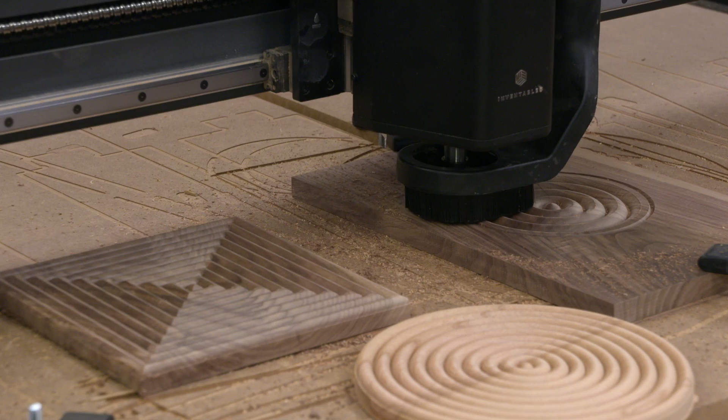Recently, I was on the internet looking for some simple, easy project ideas for our CNC machines. One thing that really caught my eye was an item called a Nordic tray. It was a simple wooden tray, but it had a lovely shape and form. It had a waveform to it, and there was a whole series of steps made by a repeating cut from the router. It looked like either a straight bit or a ball nose had been used.

And I thought, hey, that is a fantastic idea. And I did a little more looking and found all sorts of items. Easy to make, great scrap wood projects, great gifts, and that's what we're up to today on CNC Basecamp.

Well, to create the step patterns for our accessories, there are a couple of different bits that we may want to use. First off, take a look at these. These are round over bits. They're kind of the type you'd use for making a beadboard. So instead of having a pilot, they come pretty much to a point. Now I've got a 1/4 inch here, a 1/8 inch radius, and a 3/8 inch radius. That's a pretty good selection. And so those are going to give kind of a rope-like or rattan look to our products. And I think that's going to be a lot of fun.

Also, we can use a ball nose. Here I have a 2-flute upcut, which is going to give a nice aggressive cut. And here, of course, a core box bit. So the larger bits we're going to use are going to be core box. The smaller ones can just be a straight end mill. And finally, if we wanted a groove that has corners on it, just a plain straight bit like this will give great results. So you can try different things. They're each going to look a little bit different. See what you like. And with that, let's go ahead and get started on our first project.

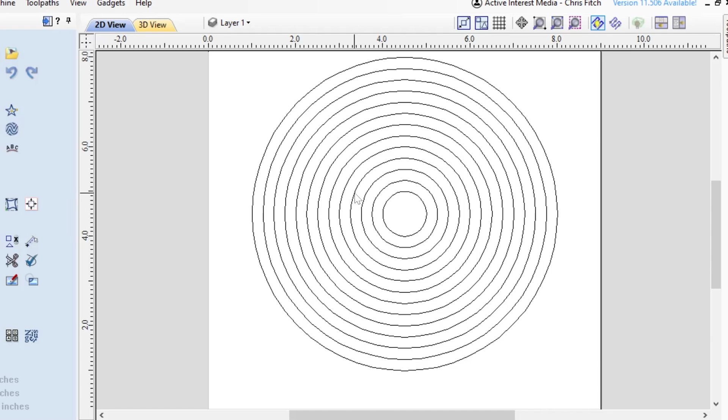Now for any of these projects, one of the first things I had to determine was the spacing between the cuts, because for a lot of these I'm choosing to have the router bit cut directly on the line. Now the spacing is going to be determined by the diameter of the router bit and the type of router bit. So let's say I'm using a 3/8 inch radius roundover. In order to get that kind of semicircular rattan look, the spacing is 3/4 of an inch, or twice the radius.

In this case, I know that I'm wanting a 1/4 inch spacing in these steps, and so that's what they are. This first step begins at 1 inch for the overall diameter, and then from there each one extends out until I achieve my final diameter for the bowl.

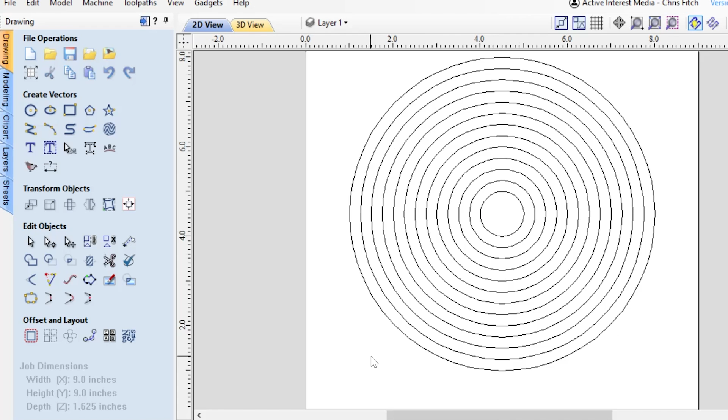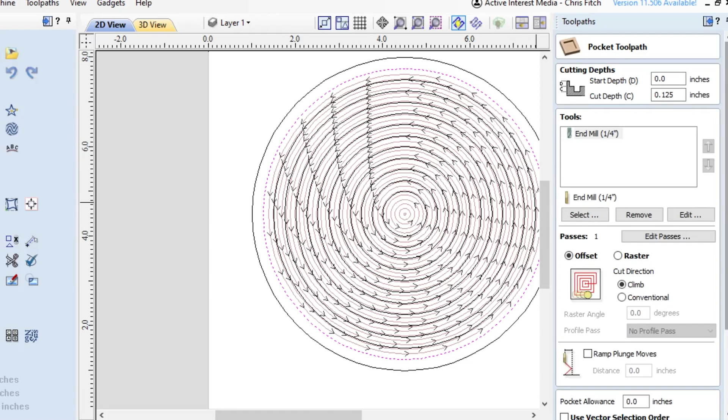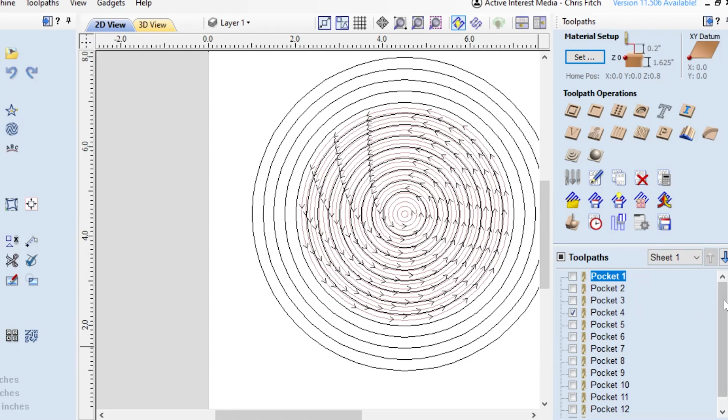Now to set up the different cuts, each cut is a pocket cut, and so the first pocket cut is this first interior ring, and all the material within that boundary is going to be cut down to a depth of 1/8 of an inch. Once that first pocket is cleared, we're then going to go to the second, the third, and so on until we're all the way down at the very bottom of the bowl, which is going to leave approximately 1/4 of an inch of thickness at the very bottom. So we do need to know our overall thickness of our stock before we begin.

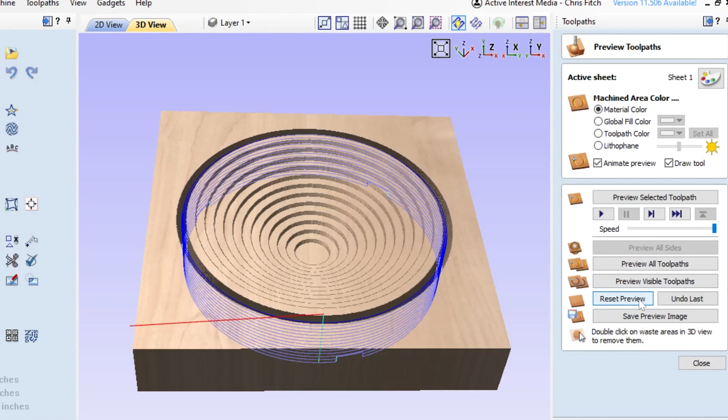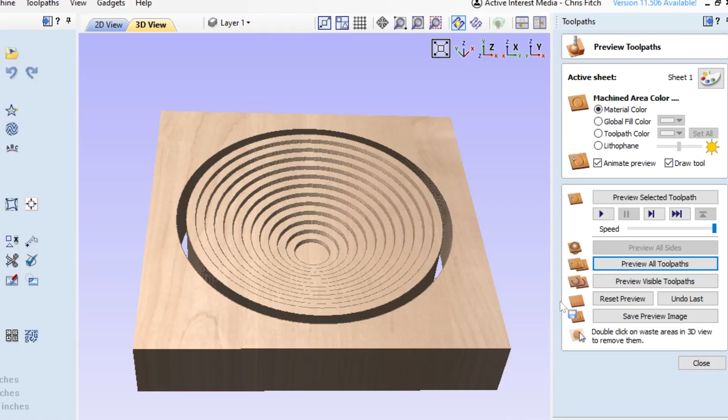The final cut is going to be a profile cut, which is going to separate the bowl from the parent material. So let's take a look at a 3D view, and let me go ahead and just reset this, and then let's preview all tool paths, and we'll see it being made. And so that's what we should end up with when we're all finished. These are easy to lay out, all the platters, the bowls. It's just a matter of using the drawing tools available and making sure that all the rings are concentric.

So we're ready to cut the bowl. I'm using stock that's 1 5/8 of an inch thick. And so each of the steps is 1/8 of an inch, and we're going to leave a 1/4 inch thickness at the bottom of the bowl. The bit that I have in place is a bit like this, and it's a big, long 1/4 inch upcut bit. And that extra length is going to be necessary because of the depth or the thickness of the wood. So we're all ready now, and we'll get started.

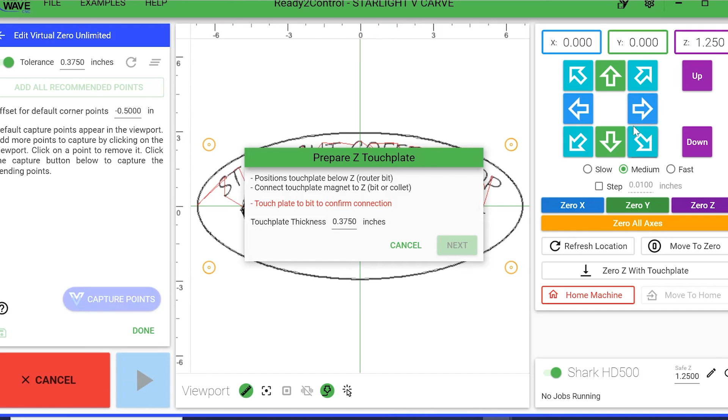So I'm going to start by capturing the points, and the first thing I'm going to want to do is move my machine to the center of my workpiece, and we're going to establish a center point. Now that I have the router bit centered over my workpiece, I'm going to go ahead and use our touch plate and establish that first location. So let me raise it up and get a confirmation, and we'll go ahead and

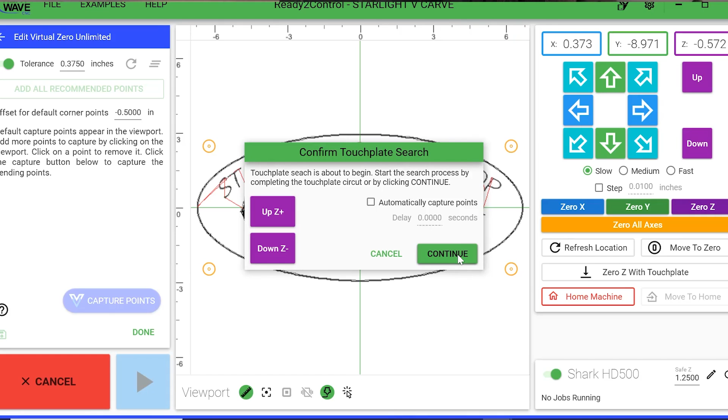It takes a little bit of time for the probe to reach down there because it's going to retract fairly high each time to make sure that it clears the material. So pause briefly and we'll continue on down. There we go. And now the machine's going to move to the next location, and we're going to go ahead and continue to map the points.

You can manually select the points yourself or allow the program to give you a series of suggested points. Now, one thing I've certainly found is that it takes quite a few points to map out the surface accurately. Right now we're just going ahead and doing 4 perimeter points along with the center.

Now it does take a little time to build the profile, but once you have it, you can save it, and it can be used on multiple files. So if I have some V-carving to do and then some profile work, the map that we're creating right now will hold and be good for both. So that completes the first points.

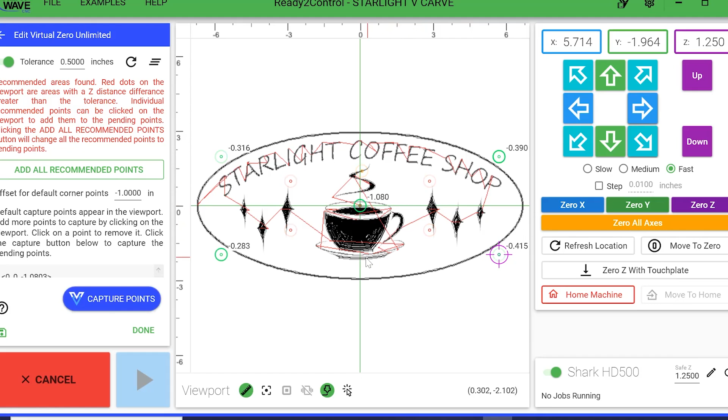Now, as you can see, the program has some suggested points, and those are flashing right now. And we can also just go ahead and manually add them. So I'm going to add one here, here, and I'm going to add kind of a smattering because it really does make a difference. The more points you add, the more accurate this is going to be. So it gets a little dull moving the touch plate around, but it really does make a huge difference. So I'm adding quite a few.

Now I'm using a small touch plate here. The large touch plate that usually comes with this machine is going to end up spanning over some of the radius. So a small touch plate like this one really does make a difference.

Now, of course, if I had 60 chairs to do for the Starlight Coffee Shop, I would only be mapping this once, provided that the blanks were all the same. So if you can be consistent in your manufacturing of the parts, then you can be pretty efficient in setting up the program and running them all. Well, we've got a lot of points plotted. I think we're ready to start. So let me fire up the machine and let's see what happens.